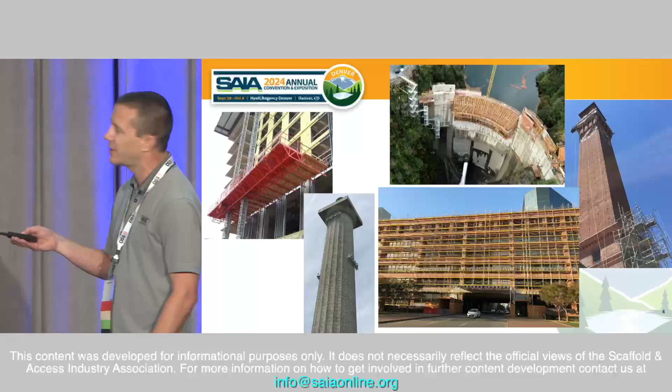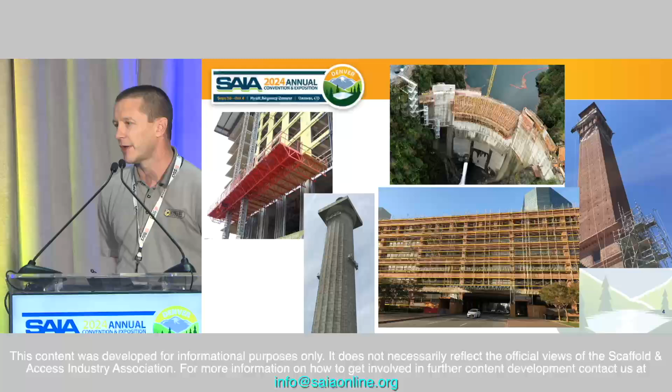So here you've got a few difficult structures being accessed. You've got a dual mast climber, you've got suspended scaffolding on a big column, you've got supported scaffolding accessing a big dam or a structure. You've also got a mixture of supported scaffolding down at the bottom and suspended scaffolding above. So you can actually intermix a lot of different things in order to access different structures.

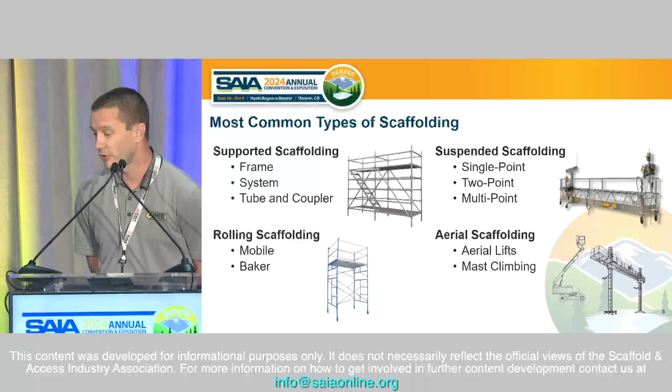As we all know, the most common types of scaffolding are supported, rolling scaffold, suspended scaffold, and aerial scaffolds. But today we're going to focus on suspended scaffolding.

Yeah, let's do that as well, that way I can walk around a little bit. Thank you. Yeah, you know what, I'm going to stay here. So just so everybody knows, I'm actually battling vertigo right now, so everything's kind of moving around a little bit. It's a little distracting, but we're going to make it work.

So today we're focusing on suspended scaffolding. If anybody has any questions as I'm going through, please just raise your hands. If I can see you, just ask the questions away. This is more of an informative presentation, and I want to answer any questions that you may have, okay?

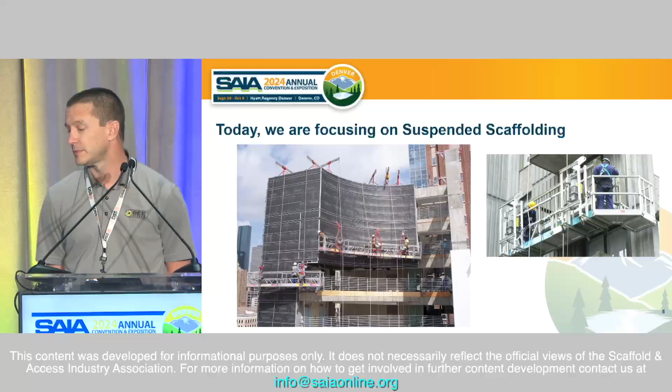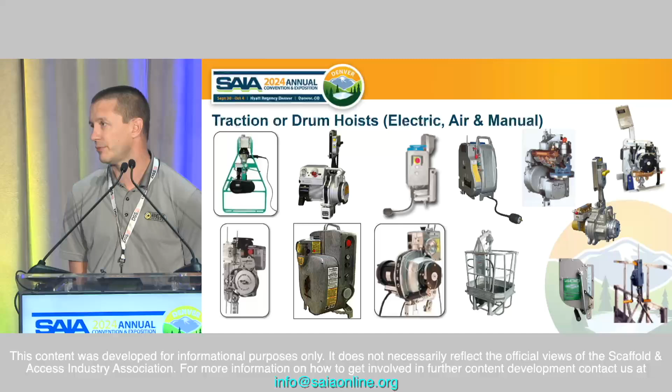So, suspended scaffolds are raised and lowered by hoists. They're located on a stirrup, and depending on the job site, you have a lot of different options out there. You've got electrically powered hoists, you've got air, and you've also got manually operated hoists. Electric ones can range from 110 volt to 220 volt, single phase, 3-phase—lots of different options out there depending on what the job site has.

But now with the evolution of battery technology and how strong batteries are becoming, different manufacturers are offering battery-powered hoists. They're also offering batteries with an inverter, so you can use existing hoists that are already out there in fleets. You also have hoists with built-in wire winders, which actually collect the wire rope so that no wire rope is hanging down below the scaffolding and potentially hitting something, like electrical lines. You've got either powered wire winders or passive wire winders—lots of different options there.

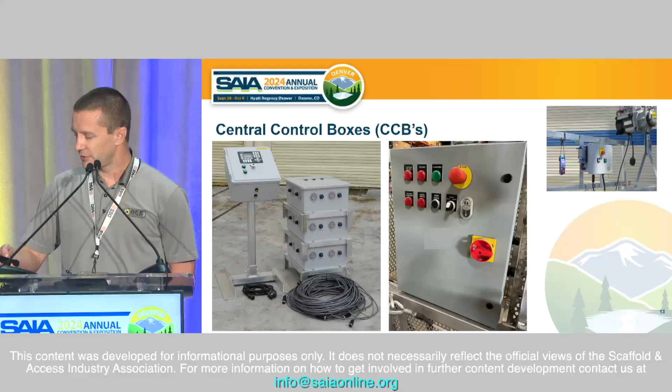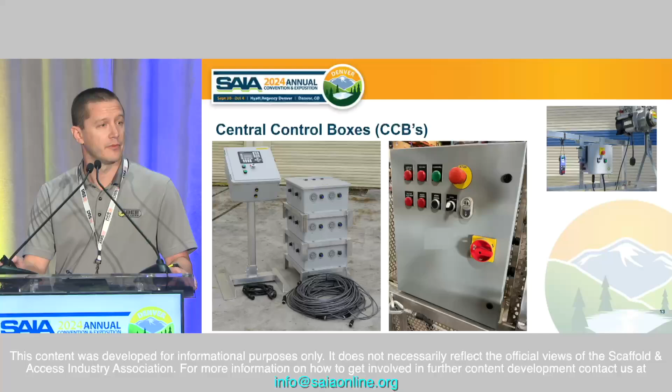These types of central control boxes, you have different options as well. You have electric, you have air, and you also have wireless. So lots of different options for central control boxes.

One of the biggest questions, though, that I get on a day-to-day basis is accessing recessed areas. That is the number 1 question. So let's really explore accessing some recessed areas.

So a double-wide platform accesses about 0 to 3 feet back in underneath an overhang. The hoist is usually mounted right there in the center of the platform. A standard modular platform is 2 feet wide, so then therefore you're able to get in that 3 feet.

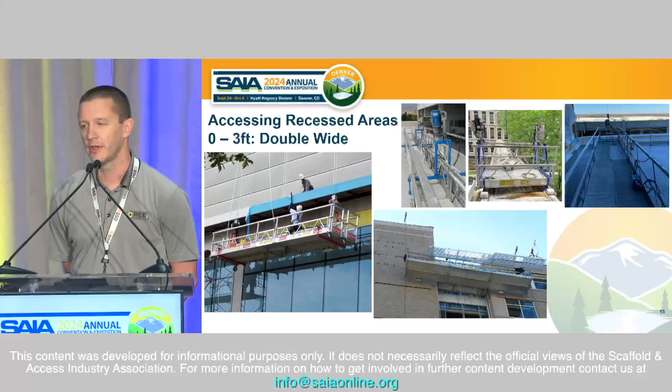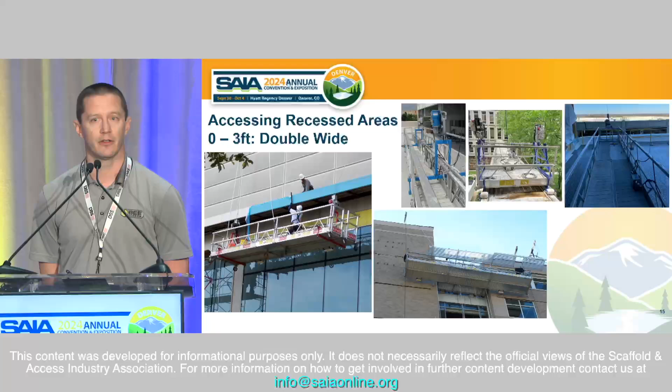Some manufacturers actually offer a platform that's wide open in the middle, while others stick with just having 2 platforms running parallel with each other, so you actually have to step over the mid-rail. There's not really a major advantage in weight capacity, one versus the other, but there is an advantage for people to be able to just walk over and not have an obstacle.

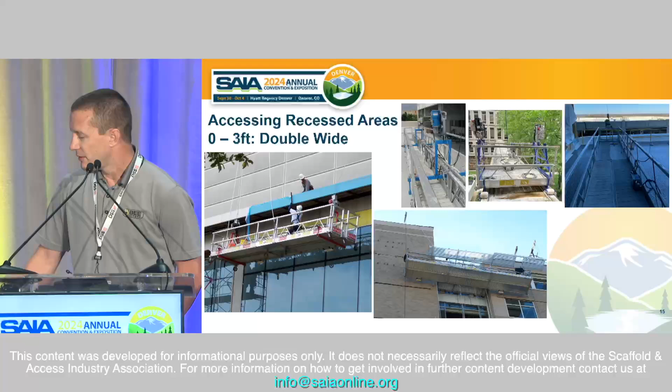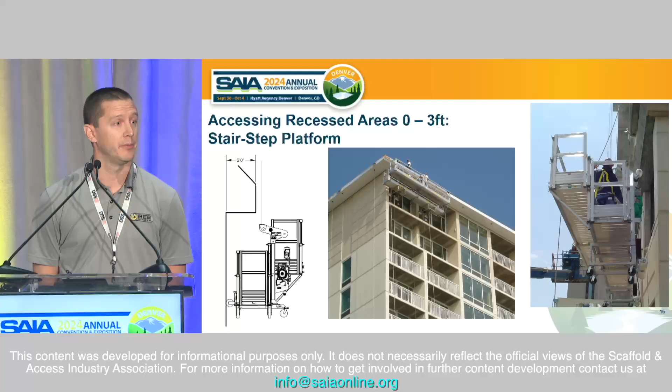Oftentimes you're using a standard stirrup, but there are custom stirrups that need to be made to use with the stair-step type platform.

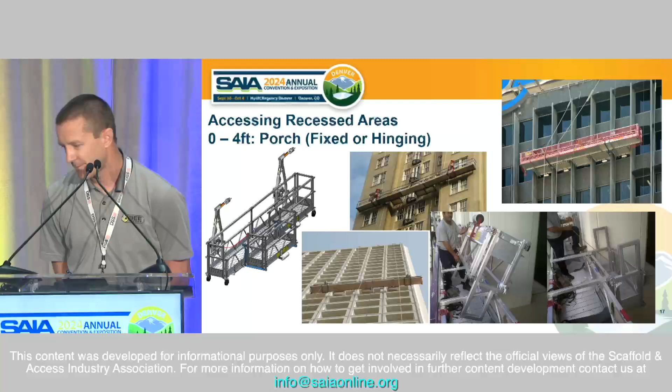Fixed or hinged porches are often used on 4-foot recessed areas. This is also depending on the application. So if you see on the top right and in that top center, that's going to be a fixed type porch. That goes for the fins or the columns that go the full height of the building.

When you're trying to gain access to recessed areas on the building, such as right here or right there, you can use something called a hinging porch, where it actually folds in and out of the platform to gain access into that area.

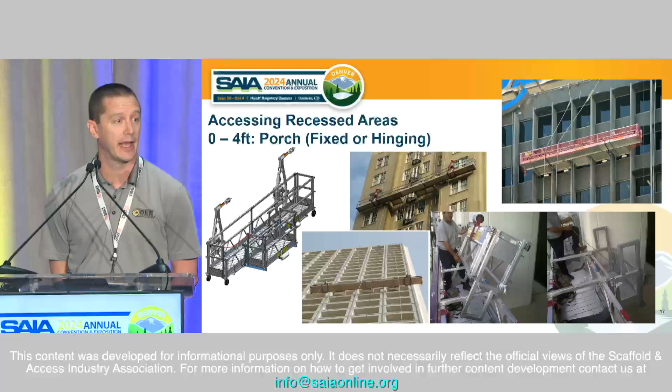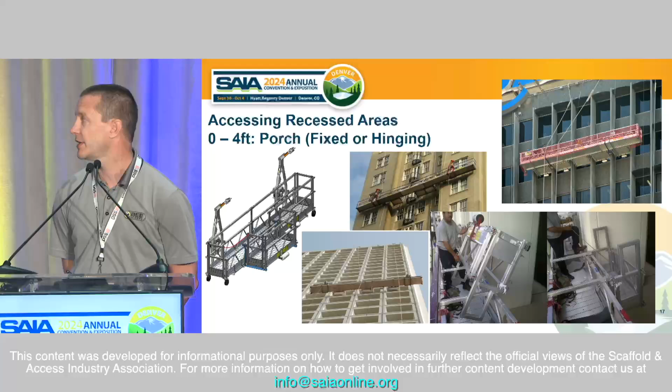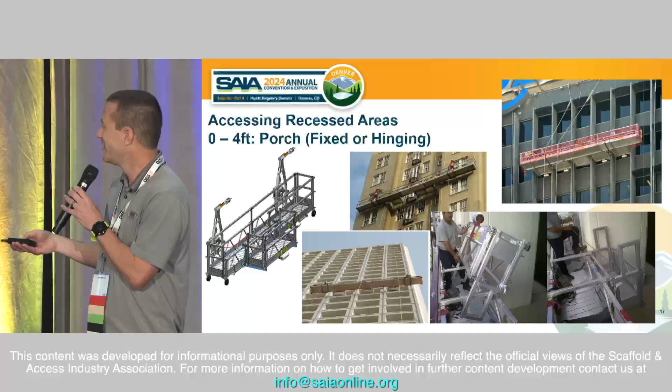There's also a few manufacturers out there that have a newer style porch where you don't have to actually step over the mid-rail. So if you look here—is that working? Yeah, there we go. So if you look here, you actually have the worker having to step over this mid-rail bracket that's supporting the porch. So some manufacturers now have porches where you don't have anything in the way, and it's wide open to just walk straight through.

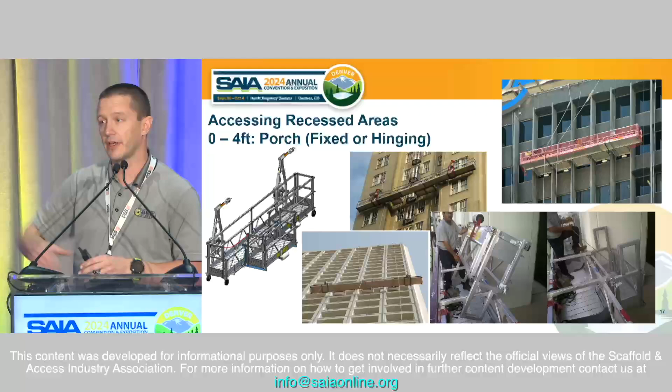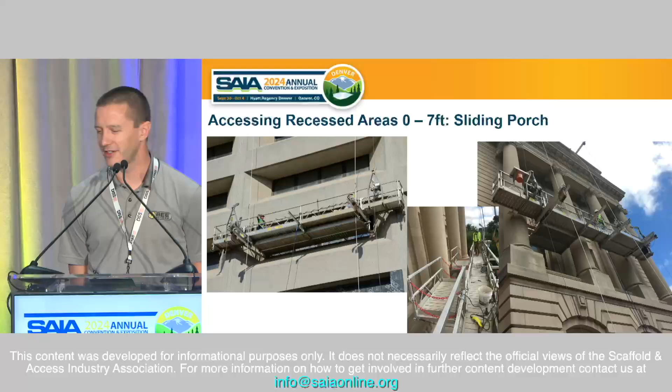So for sliding porches, this is a long porch. That goes back in about 7 feet from your suspension point.

The sliding porches, a worker actually pulls a rope and the actual sliding porch moves out one direction, and a counterweight goes in the opposite direction to counterbalance the tippiness of this. Then they pull another rope and the counterweight comes in with the porch all at the same time.

The issue with a sliding porch is the load capacity. There's usually a low load capacity on this because they're very heavy.

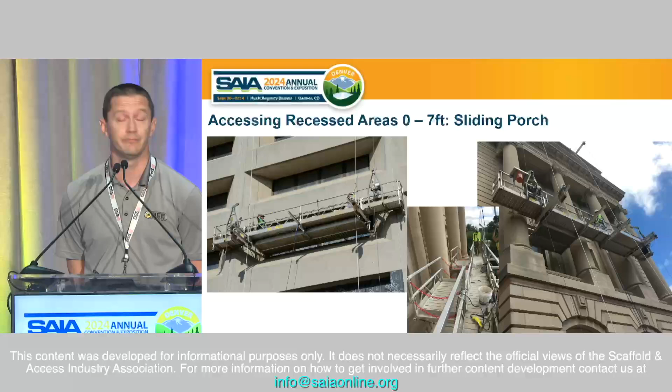Another option is actually taking a modular platform and creating a rectangle out of it, and then cantilevering that rectangle so now it can actually come further back into the underhang. This can usually go up to around 7 feet.

This is one of those that is fixed and has to go all the way up and down the full area of the building. These also have a very low load capacity because when you're out on that cantilever, you're putting a lot of load and strain on a lot of those different components.

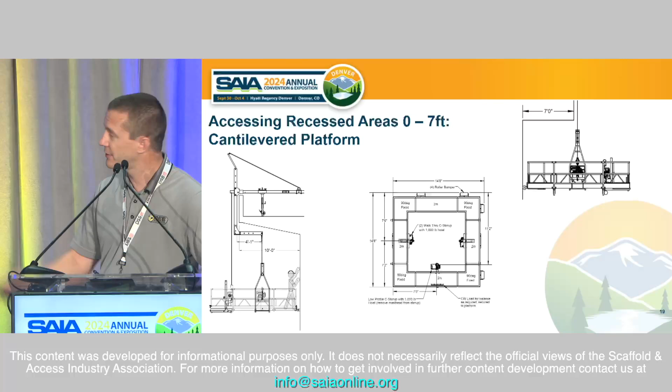Dance floors are usually used to gain access to very, very large areas. Dance floors also usually have rigging from underneath the overhang.

You can have access on the outside of a building or even inside. So if you're doing atrium access, anything like that, you can use a dance floor, and you have the full surface area on that whole area to walk around.

Load capacities on dance floors are actually very dependent on the number of hoists. So the more hoists that you have, the higher the load capacity.

Another one is actually using custom equipment. Most of the time, this type of equipment is used on permanently installed platforms and rigging, but this is where the actual hoists that you see right there in the center are actually picking up the platform and a counterweighted system on the back-hand side. Depending on the location of that counterweighted system, it actually pushes the platform back into the building. You'll actually see a picture of one of these on a BMU later on.

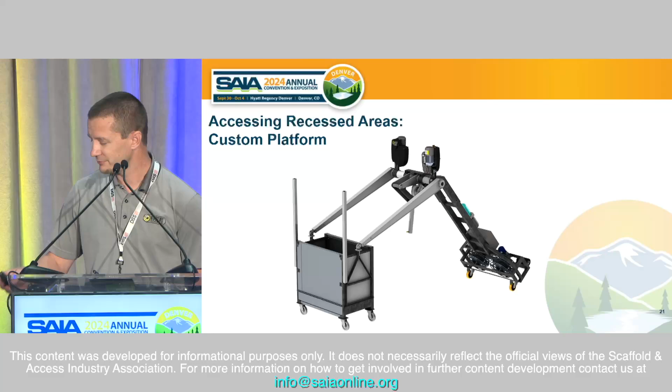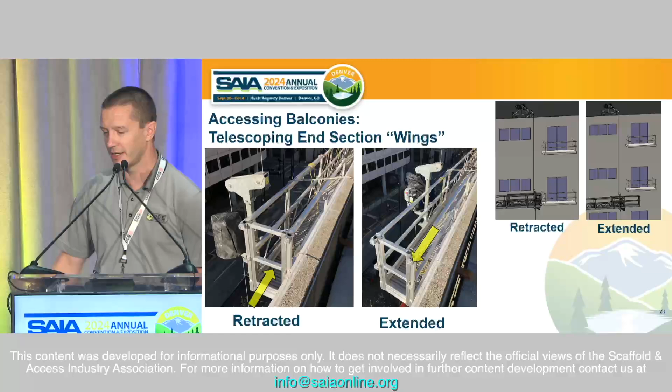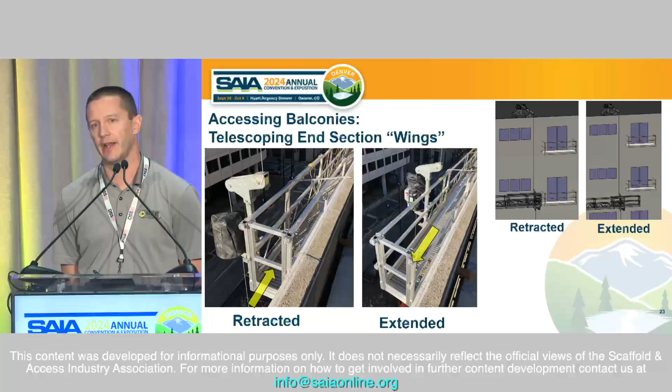When you have platforms that can extend in and out, you can use this type of thing. It's a telescopic end section or wing where that platform itself extends in and out where you can gain access into that balcony. A lot of times they're used on balconies or even crane tie-ins or something like that, so you can get around that tie-in.

Multi-tier platforms can be used when installing long panels, siding, windows, or you're just needing access at different heights on a building all at the same time.

You have two different styles. You have it where it's actually a fixed or adjustable height. The adjustable would be used with wire ropes to actually provide the distance between your platforms, or ladders, so that now all of a sudden the personnel can walk from one level to another level and have access all the way through.

When you're using multi-tier systems, the personnel up top are not required to be on a horizontal fall restraint system. The people on the lower level have to be. So then therefore it's actually going to be considered a 4-line system where it's 2 wire ropes per hoist.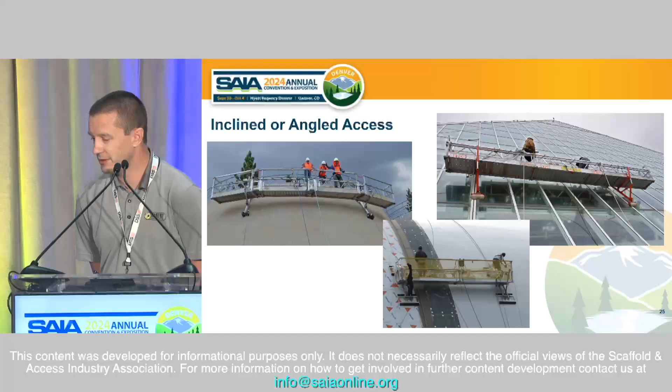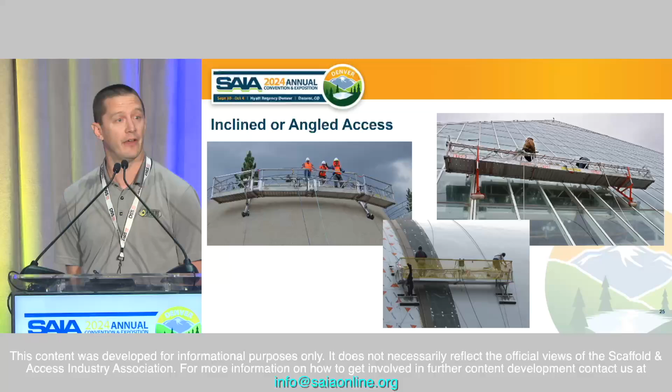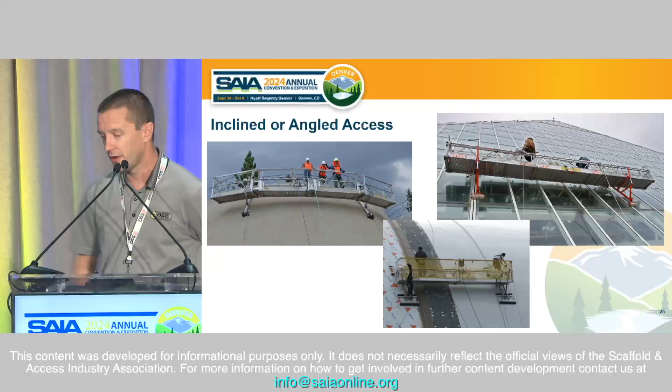Another option is inclined or angled access. So when you're on something like a dam, a pyramid, or any type of inclined surface, this type of stirrup would be used. One thing to really note is the actual rollers, because they're very crucial when using inclined stirrups due to what they're rolling up on. If they're on windows, you want something that disperses the load more. If it's on a concrete structure, it doesn't have to be. You can see a lot of different roller styles here, here, and there on these platforms for the different applications.

Under bridge access. When you're trying to get underneath the bridge, there are lots of different options. You can have a fixed type platform where it's just fixed in one section and runs the full length, something like up top here and up top there. Or you can have it on a roller system where the whole thing goes the full length of the bridge.

Sometimes you can even have it suspended on hoists so it's able to go up and down. As you see here, you have a bit of an archway on that bridge, so as you go one direction or the other, you actually have to raise up that platform. You can have hoists on the whole system to come up and down. Access to the platform is usually used with supported scaffold.

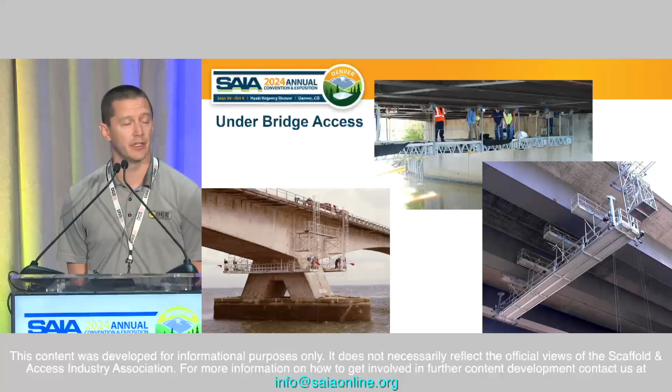Cable access on a bridge. There are two really different styles that different manufacturers offer for this type of system. One is a fixed platform that just rides the length of the cable itself. The other has a cart that rides the cable up top, and the platform suspends from that cart, so you're able to gain access up and down the full length.

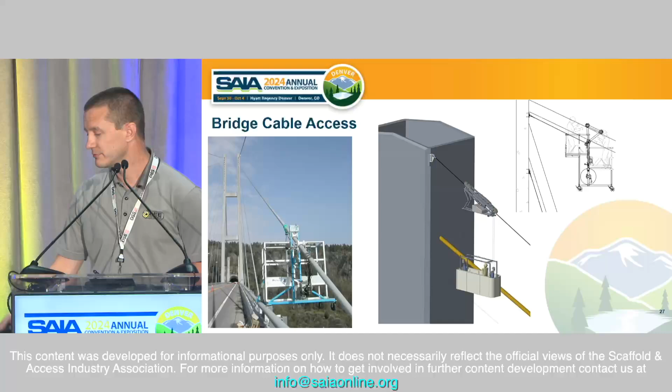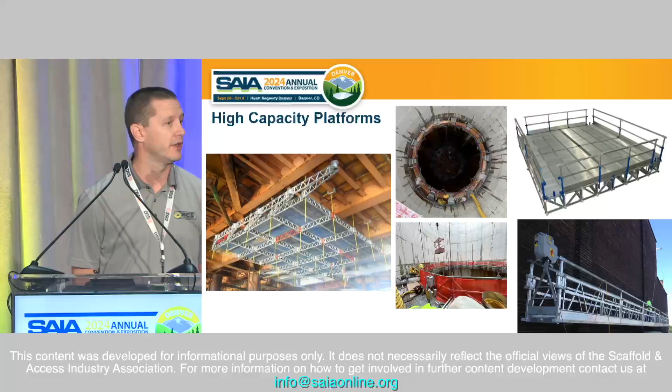There's also high capacity platforms, and lots of different types of these are out there on the market, from something very similar to the stationary deck on the bridge you just saw, to using system scaffold with some special stirrups, suspending the system scaffold to go up and down. Another option is custom-made high-capacity platforms that create dance floors or even just a straight platform. Depending on the application and what's really needed, there are lots of different options out there for access.

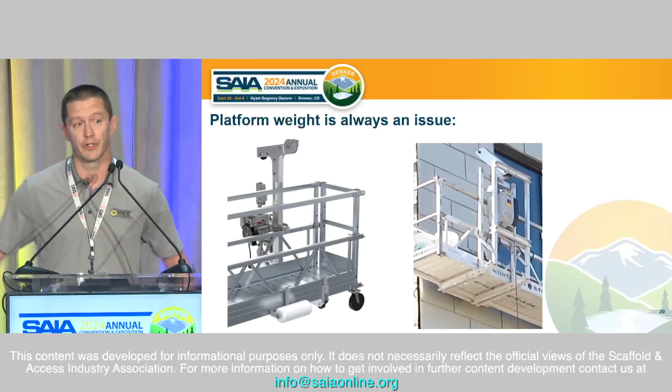The biggest issue that suspended scaffold has is you have two or three hoists on the platform, and you're trying to lift up all this material, the platform itself, and everything. So the lower the weight of that platform, the better, so you can get more material on and get more work done. So manufacturers are creating new types of stirrups, new equipment for the platform, accessories, all of it, making them out of aluminum and lighter weight stuff. Now you've got aluminum stirrups, aluminum bumpers, and another aluminum stirrup out there. Lots of different stuff to reduce the weight so people have higher load capacities on the platforms.

Another form of access is elevator access. These are called false car systems, where you mount a rail system inside the elevator shaft, and the false car goes up and down along those rail systems. They're often used with very high capacity hoists that run at different speeds than the standard suspended scaffold hoists out there.

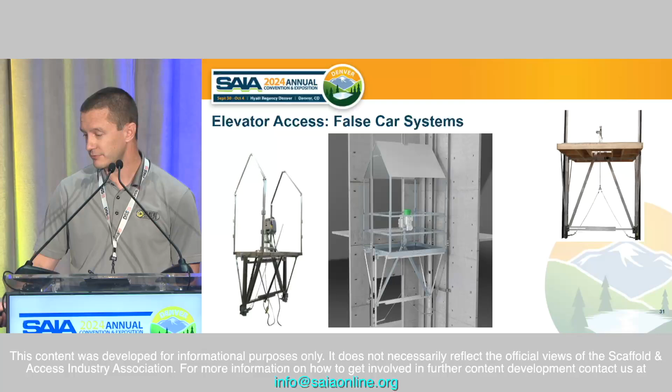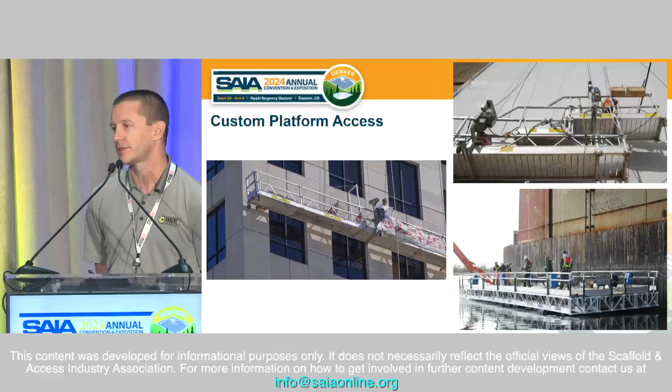The next one, top right, is something called a stair step platform. This is really for roofs that are at an angled surface. So you have rigging here and here, and you're trying to go up, so now you're able to go up the platform and have access to that entire angle.

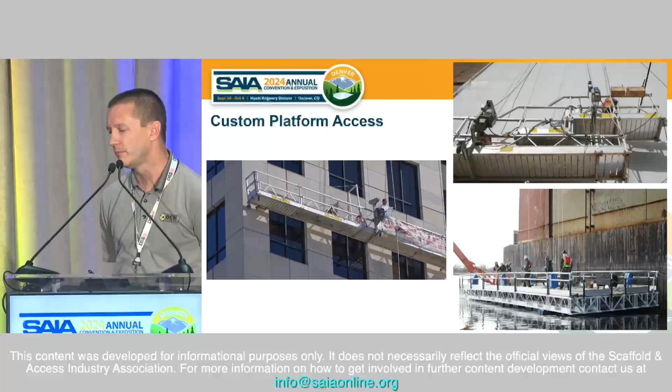And then also you have custom platforms where you can't get a barge underneath, and there's a waterway or something like that, and you can't get a barge to actually bring your platform in place. So manufacturers create floating devices to actually go and keep that whole platform, that big dance floor, floating. You bring it into position and then lift it up.

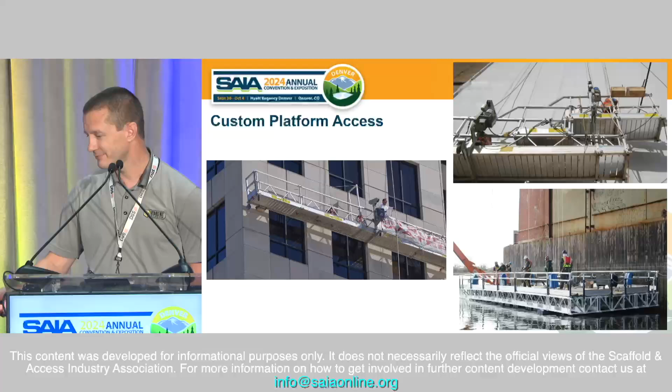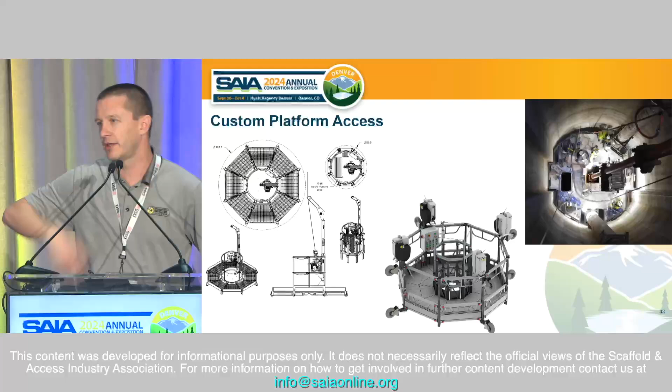And then last but not least, on the right-hand side, you've got something called a digester platform, where you have the open center. And in this one instance, there were some custom features that were also inside this shaft that we had to create different cutouts within the platform to gain access and go up and down.

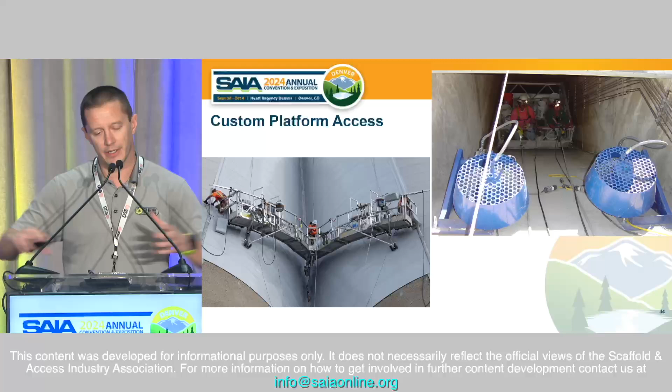Creating a V section. So when you have a really, really tight area, where in this instance it was a dam, you had two areas that you had to actually come into the middle of and gain access right there in that center, creating a special custom area to have the modular platforms on either side, and then you have the custom section right there in the center.

You also have an inclined platform that goes into a shaft, and so you have the hoists that are mounted up on the rooftop. You have wire winders, and then you have a pendant that operated those hoists to raise and lower the platform.

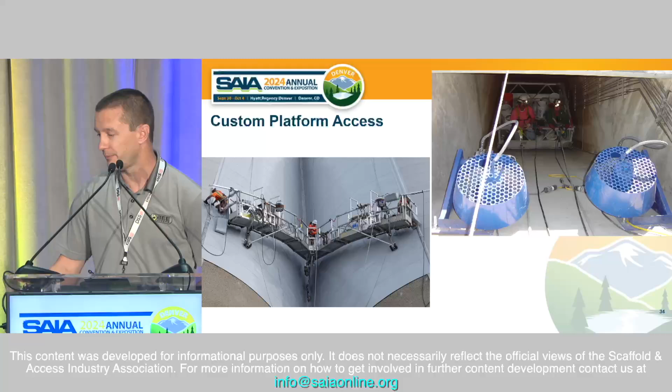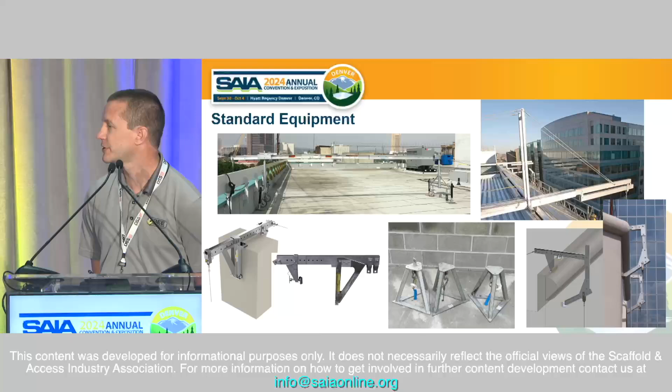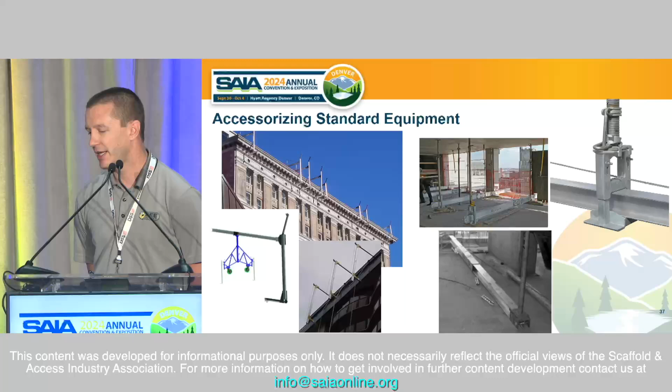But now what's happening is manufacturers are accessorizing those standard equipments. So now what we're able to do is create custom pieces that attach to all those components that you already have. On the left-hand side, you have something called a down and under. That gets the rigging point to be underneath where your actual support is located.

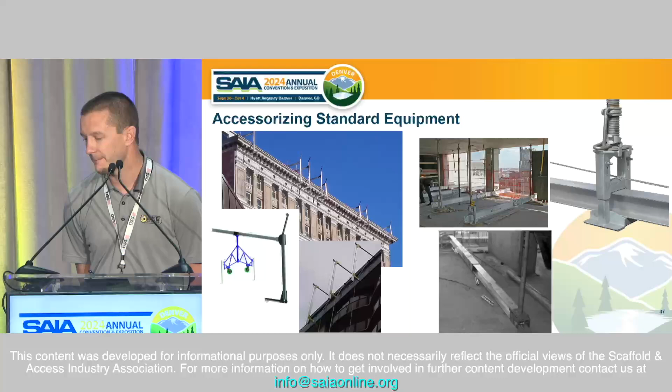You have on the right-hand side in center pictures something called a post shore adapter, where instead of having to lug up 50-pound counterweights to the rooftop and support and counterweight the outrigger beams, you use a post shore, and that goes and applies the load into the structure on the backhand side.

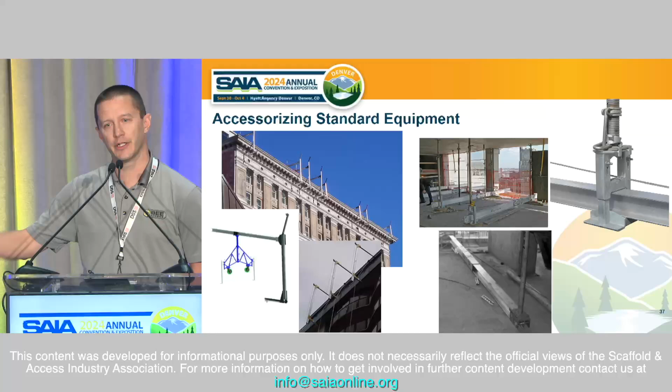You can also put the outrigger beams right on top of scaffolding. And you use a header beam or something like that which can support the load on the scaffolding.

You have beam clamps, and now you're able to get the beam up higher to either roof launch a platform, get over tall curtain walls, large parapet clamps, or even span a big difference, like if there's a pool in the way or something like that.

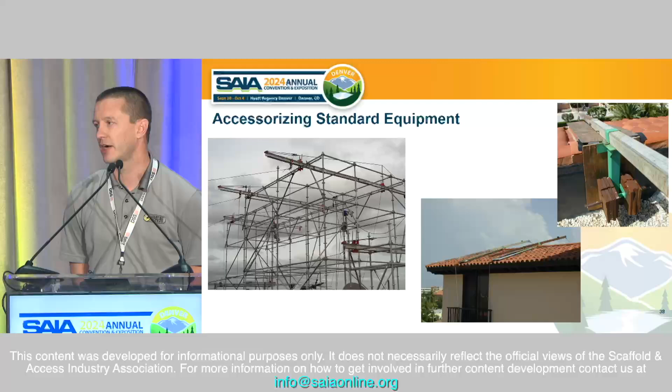On the right-hand side, you have something called mansard beam brackets, where if you have a sloped roof and you're trying to gain access down below without wanting a massive outreach, you can use a mansard beam bracket.

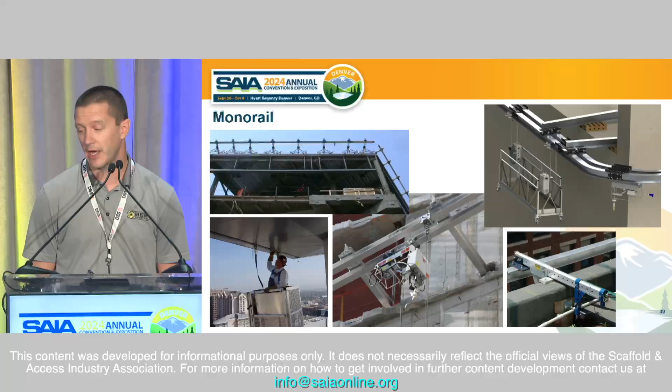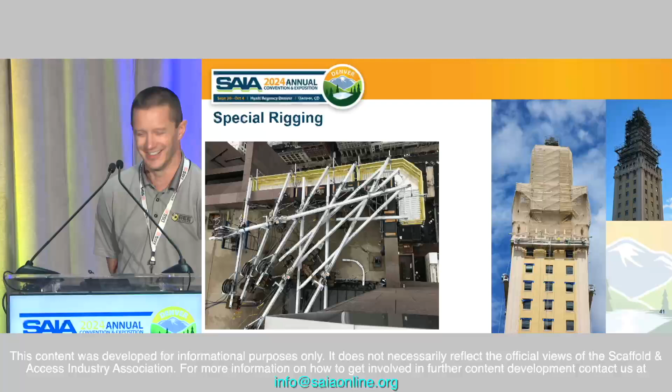On the left is a hodgepodge, as you can see - lots and lots of equipment on this corner of the building. You've got 2 double-wide platforms, powered wire winders on the rooftop, a wireless CCB so operators on the actual platform can raise and lower themselves, and a monorail system with a turn in it to pick up material and bring it into position.

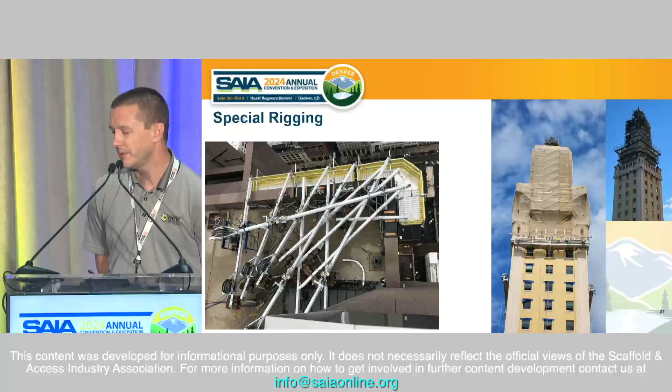On the right-hand side, you've got supported scaffolding and a suspended scaffold. What's happening here is the supported scaffolding is supporting the rigging outrigger beams, and the suspended scaffold is coming right off of that - accessing above with the supported, accessing below with the suspended.

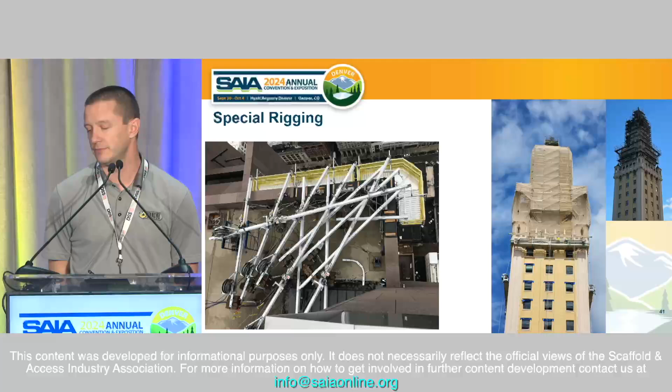Now let's get into some permanent rigging. This is permanently installed outrigger beams, very similar to the standard outrigger beams used in temporary access, but these are tied straight down to an anchor, so no counterweights.

You also have options of a back-fed outrigger. In this instance, that outrigger beam is attached straight into the structure of the building. You're able to feed the wire rope straight through that beam, and the wire rope just comes over the edge. A lot of times that's used on an unprotected edge of the building, so if you can't have access over to that edge, you're able to use the back-fed outrigger.

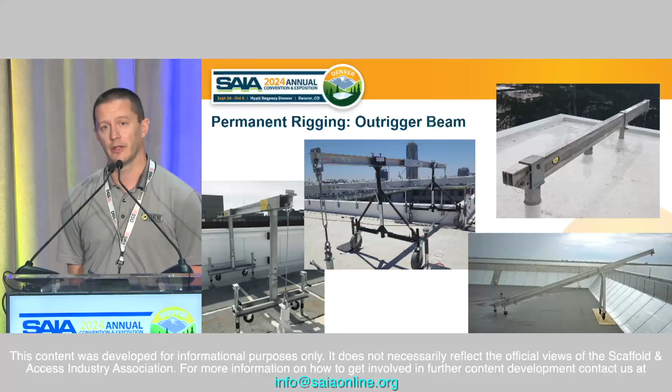Push-out outriggers - these are very similar to the back-fed outrigger. The push-out outrigger are beams that slide through a hole in the building. Oftentimes these setups have a little flap on the top of that hole to prevent birds from coming into the attic or whatever is on that building and creating a nest in there.

Davits are on a lot of different rooftops, right around here actually, that I've seen. You have 2 different types of davits: a top rotating davit and a bottom rotating davit. Your top rotating davits are for roof launching a platform - the platform is actually assembled on the roof, it lifts up, comes out, and goes down the side of the building. The bottom rotating davits are for ground launching, where the platform is assembled on the ground and then raised up from there.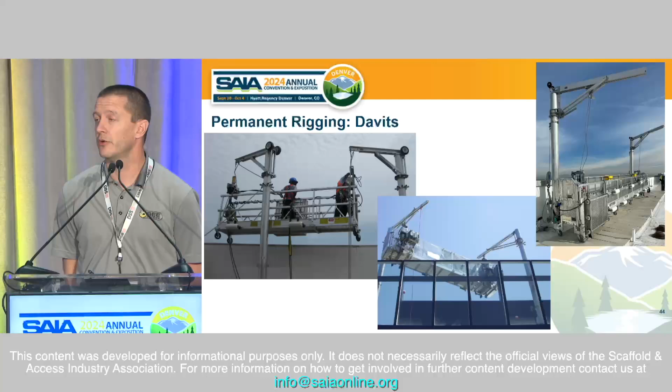One thing a lot of people don't realize is you can have a mixture of permanently installed equipment and temporary equipment on a building. Here you can see permanently installed davits with a temporary platform, and right here in the center is permanent platforms as well. So you can have a mixture of all this different equipment on buildings.

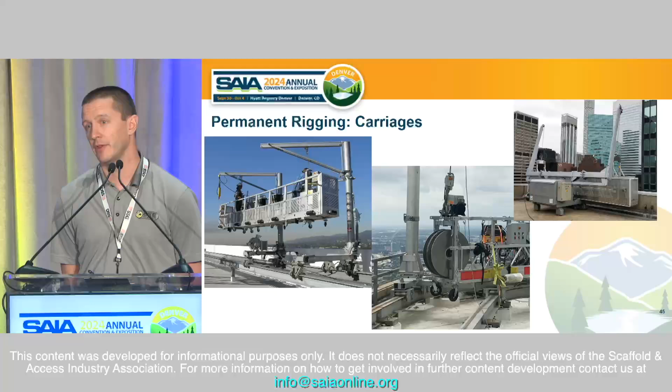You also have things called roof carriages - these are davits or a carriage system. The carriage system is on the right-hand side, where these are rolling on a track. If it's davits, you can use it with temporary or permanent platforms. Usually, though, when you have the standalone carriage, those are used integrated with a permanent platform, because you're actually able to operate the carriage and the platform usually from the same location.

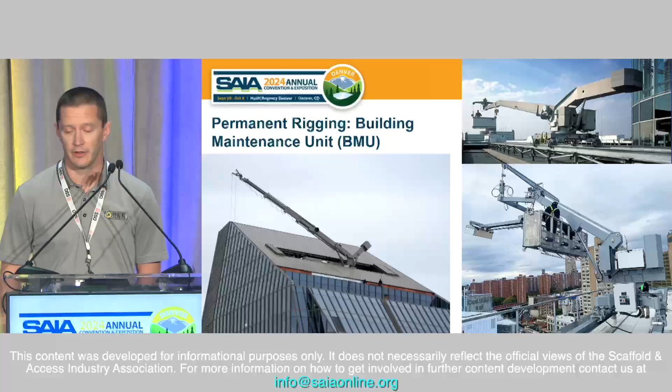So the suspended access industry has come a long way, but with the help of engineering, we are continuing to invent new, safe solutions to accessing buildings that architects are dreaming up of. Thank you for your time. If you guys have any questions, please feel free, I'm here.

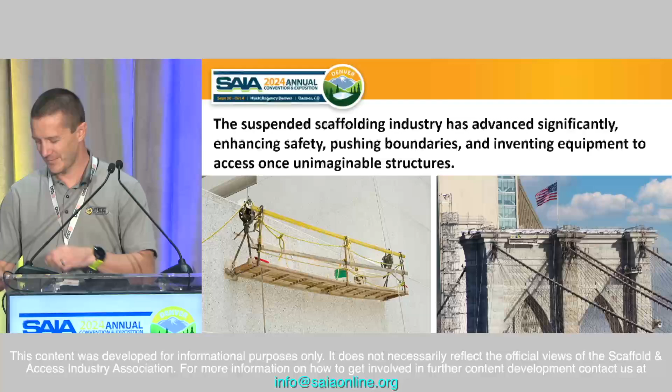So are there any questions? One back there.

So for the swing stage with the massive canopy on the side, typically swing stage has a little bit like 2 workers per channel. You have to get very specific, like only 1 worker on the cantilever. Usually what happens is when there are those massive cantilevers, that's more of a custom type platform, and you usually have one person that's able to go out there, so it's a 250-pound capacity. You also usually have to have a backspan, so that platform can't just have a massive cantilever and a very short section here. Usually you have to have a good span back to counterbalance that cantilever. Sometimes, though, when you don't have that, some manufacturers will go and actually put counterweight on the back end of the platform itself, securing the counterweight to the actual platform so it can't shift, it can't move around, and now it's counterbalancing that whole system.

Rick? The one picture you showed where you had wire winders and the hoist mounted on the outer beams, what was the reason for that? Okay, I'll repeat to the room: on that picture you showed where you had wire winders and hoists on top of the beam, why was that option utilized rather than the more typical method of having the hoist on the platform itself?